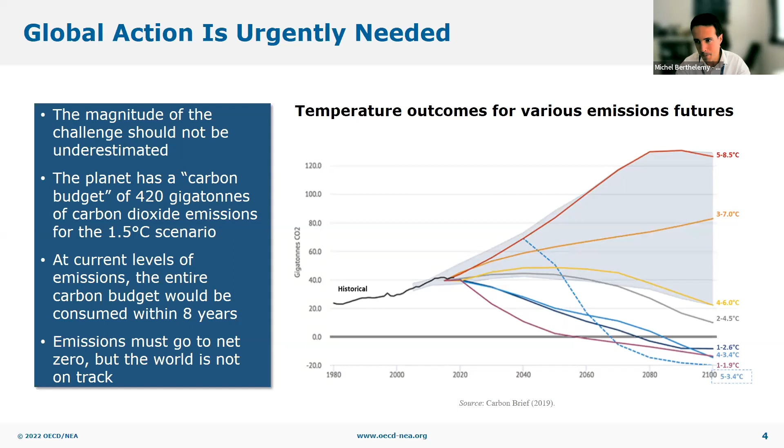So how do we get there? Go to the next slide. There's a number of pathways that have been published by a number of institutions, including partners of the NEA, such as the IEA. And all these pathways are based on this carbon budget we have to deal with, and they provide different strategies for how we can be on track with this objective, which then translate in many cases into reaching net zero by 2050.

First, it's important to note that all these pathways include some level of nuclear energy. On average, we see in many scenarios that would mean at least a doubling of nuclear installed capacity between today and 2050.

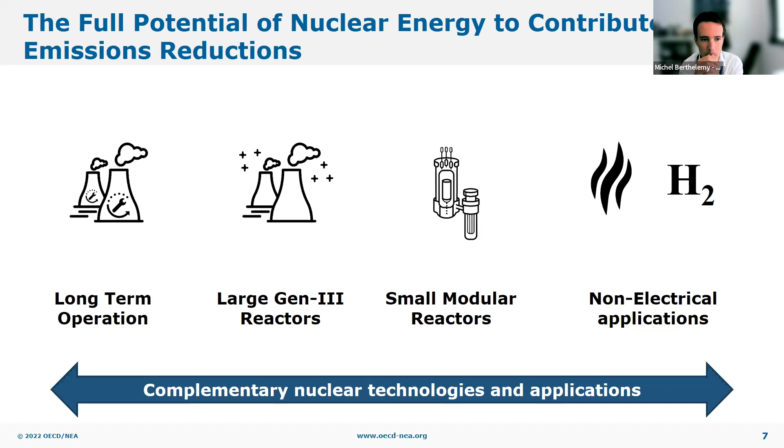Because time is limited, I'm going to jump straight to the result and our key findings. You will have more detail in the report. Our key finding was that looking at conservative and aspirational projections for nuclear energy in these different blocks - long-term operation, large-scale new build, SMR, both electric and non-electric application - we see that nuclear installed capacity could reach by 2050 nearly 1,200 gigawatt electric compared to about 400 today. So it's nearly a tripling of installed nuclear capacity.

What's interesting, you can see on this graph, is that when we look at what the IPCC says in its summary report, on average scenarios, world climate change mitigation scenarios will require a tripling of installed nuclear capacity. It's very much a coincidence that we show one of these key conclusions of the average of scenarios the IPCC is looking at might well be within reach if we can really rely on all nuclear technologies and applications.

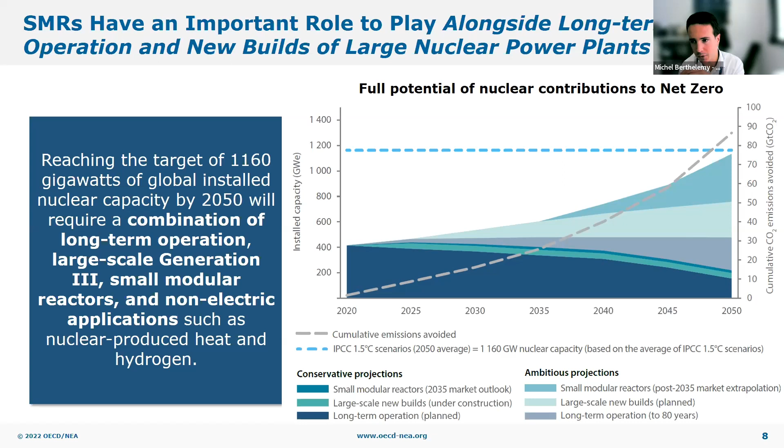However, there's a number of opportunities or challenges for us to get there. When we really limit our exercise to what is currently either in operation, under construction, or planned, we see that starting in the 2030s there is currently a growing nuclear capacity gap, which translates into very much some urgency for taking action today.

And of course, the challenge here is that one needs to translate to policymakers that they need to take action now, and if they don't take action now, they won't really realize before the coming decade that they're not on the trajectory that will be compatible with meeting climate scenarios for nuclear.

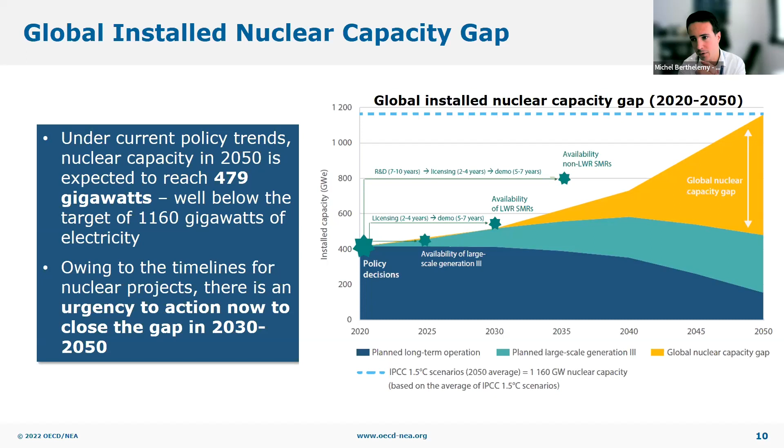We identified in the report a number of key challenges, and I won't list all of them in the interest of time. I will focus on one that, from the work NEA has done over the last few years, we really see as the most significant: understanding what is the cost and competitiveness of nuclear power in net zero scenarios where we're going to have large scale renewables in any case.

This is important and central because a lot of the conversation today still relies on plant-level analysis of the cost of different technologies, nuclear and renewables. Only looking at plant-level cost, we see that becoming an increasing challenge in a world with variable renewables, because there's a number of costs occurring at the system level related to integrating variable renewables, managing the grid, and getting more margins for your systems with more intermittency of renewables. All these costs, as we have higher shares of renewables, become increasingly significant.

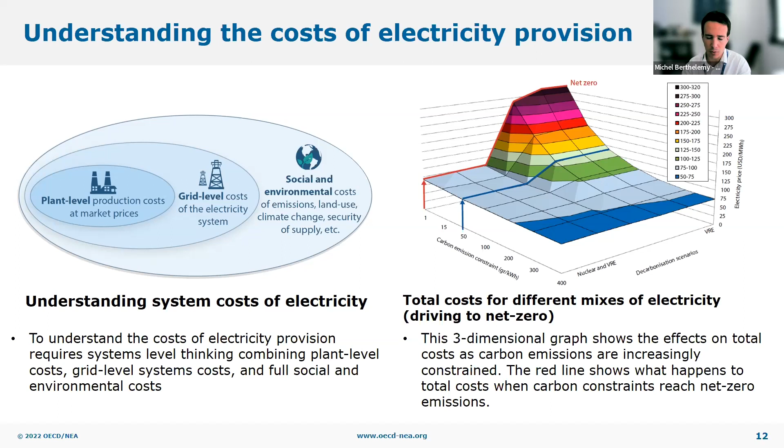So really, we see that as critical for understanding what will be the competitiveness of nuclear in the future.

Moving on to conclude briefly with some recommendations from this study. The first is on the urgency of action. This is something for both government and industry that have to come together to address this challenge and demonstrate that we can commercially deploy nuclear energy innovations at scale.

First is on addressing timelines, because there is clearly some issue with providing the right timeline for taking action on climate. Sometimes one may hear the argument that nuclear power plants have too long construction time, and that the lead time might not be compatible with the urgency of taking action on climate.

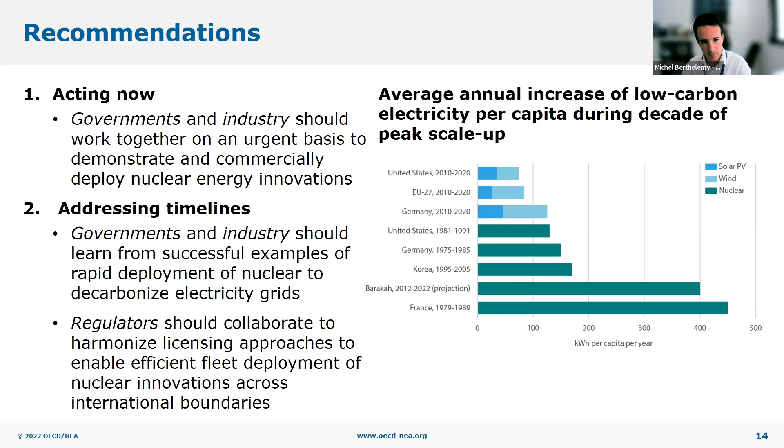In a way that will be compatible with climate timelines. Moving on to the next slide, and this will be my last slide, a few additional recommendations.

First, on the importance of understanding and reducing cost. This is something on which the NEA has done extensive work at the system level, but also at the plant level, in particular for OECD countries, providing practical advice for governments and industry on how we can reduce the construction costs of large-scale Gen 3 reactors. Our study shows there is a significant opportunity in the coming decades to do so in OECD countries.

Of course, this is not something industry or government can do on their own, and there is very much a sense that this has to be a joint effort. Public confidence, maintaining a high level of public confidence and trust, is also equally important in our eyes.

I will finish with one last point, on financing, where we see that, if the other points are addressed, it is still a significant challenge that has to be tackled, including the role of nuclear in taxonomy and ESG, among other themes, all of which we will have the opportunity to come back to, I'm sure, in other IFNEC webinars. So with that, it concludes my remarks.

And again, thank you for the opportunity. I look forward to the questions and discussion afterward.

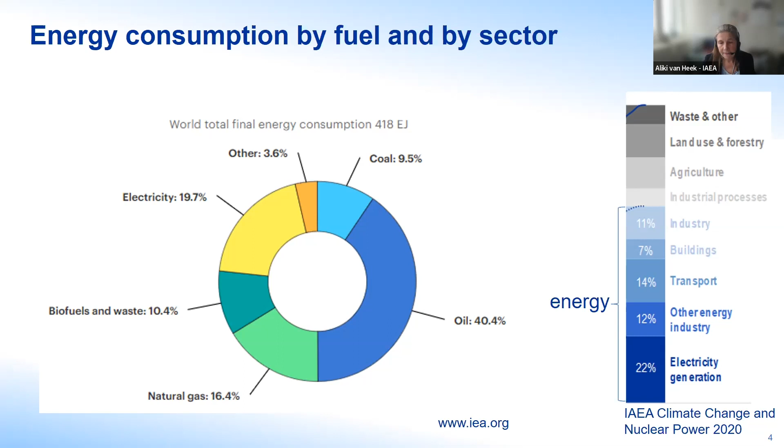As the previous speaker mentioned, climate change mitigation is urgent. So when we're looking at how to replace coal with nuclear, it's wise to look first at those countries that already have nuclear programs existing or are already engaged in starting up new nuclear programs.

So among the 32 countries currently operating nuclear power plants, there are 10 countries that have decided to include nuclear energy in their generation mix, with plants under construction or in advanced stages of preparation.

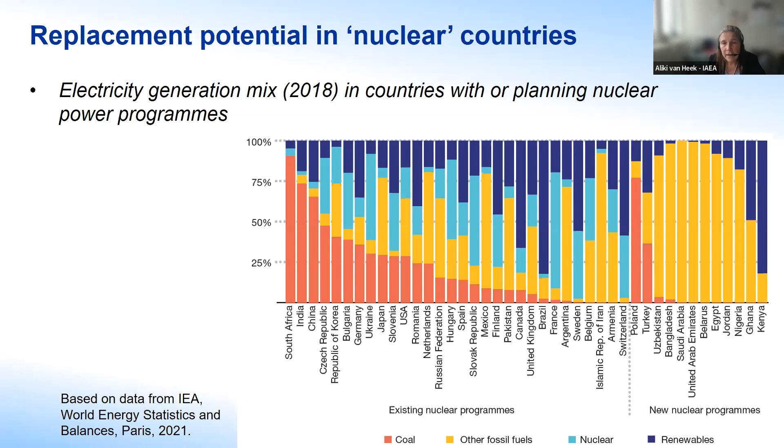This is the Temelín nuclear power plant in the Czech Republic, which has a heat distribution system extended to the town nearby. This helped to eliminate 22 medium-sized coal-fired boilers in heating plants, and 3 large boiler facilities, with this nuclear facility—which also helped clean the air in this region a lot.

Which nuclear technologies could be available to replace these fossil fuels? That's on the next slide.

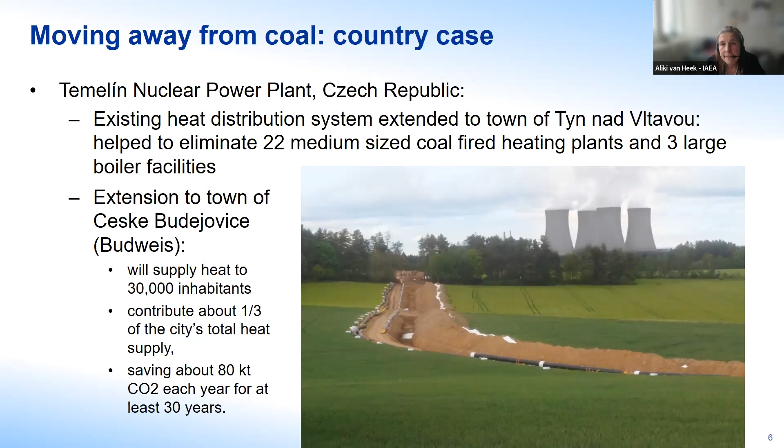We have categorized the nuclear technologies for replacing coal into 4 groups. The existing water-cooled technologies are the first category, but there are 3 other ones with small modular reactors. The large water-cooled reactors can provide electricity and low temperature heat, and could replace coal as a multi-unit power plant. It's a mature technology, with more than 300 units in operation.

Then there are 3 categories of small modular reactors: the water-cooled ones, and small modular reactors which are advanced technology, usually with different cooling media like helium gas or sodium. Then there are the advanced small modular reactors that will need more time for development, with salt or lead cooling, and also the very small ones, the micro reactors.

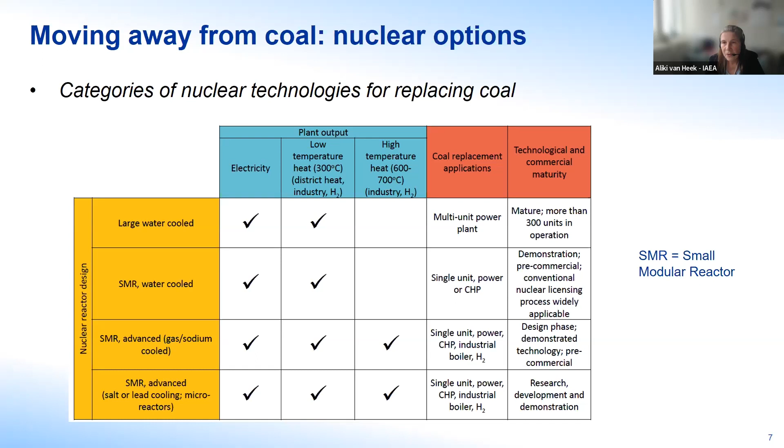Okay, how about then replacing other fossil fuels like oil and gas? Today, many hopes are put in the hydrogen option. Next slide, please.

There's these options of power storage, steel, shipping, aviation. They're highly likely in large long-term demand, so there's a lot of attention going there now. And the others, the yellow ones, are potential role technology options.

So that is more further away: high temperature heating, rail, plastics, and heating. And then there's some short-term transitional uses, but that still could be quite useful to get the market going, to get this production on a relatively relevant scale going, like co-firing of ammonia or hydrogen, or gas grid blending.

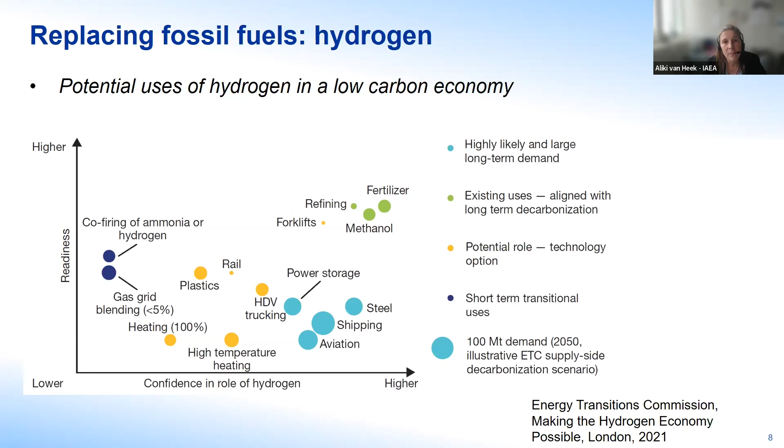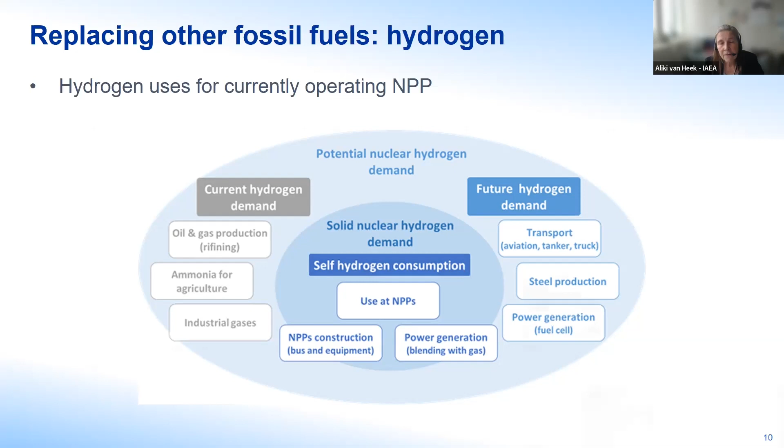Next one, that's the final slide, so looking at some differences and some outputs of this hydrogen project. We observe several project differences in search for the markets. Each utility targets different demands, but faces all the time the same challenge of finding a market where they can secure a reliable revenue stream for their hydrogen development projects.

There's no winning electrolyzer technology yet. Different technologies are being selected, and there's no clearly defined superior technology yet.

And then the location - there's still discussion whether to put that near the nuclear power plant or near the user facility, the hydrogen demand facility. When hydrogen is used primarily at the nuclear power plant, of course it's put near the nuclear power plant, but it's only as a step to commercial hydrogen production. And of course when there's a large demand facility, the electrolyzer will be put near that location and the electricity will be transported there.

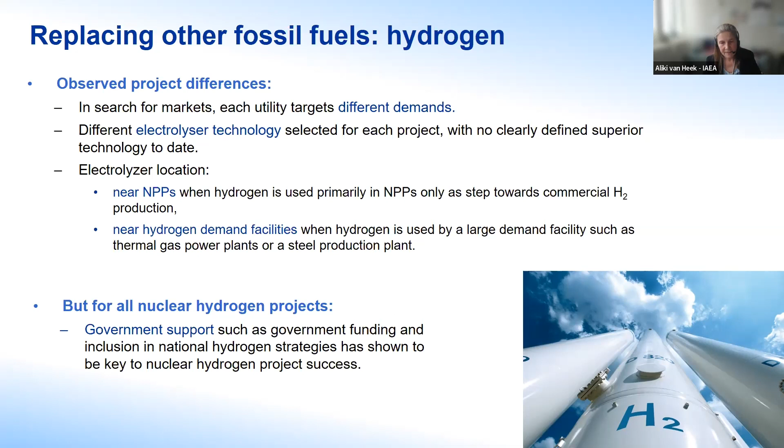But like the previous speaker already mentioned, government support is essential, such as government funding and inclusion in national hydrogen strategies. It is key to the nuclear hydrogen project success. And with this, I want to conclude my presentation, and I'm open to questions.

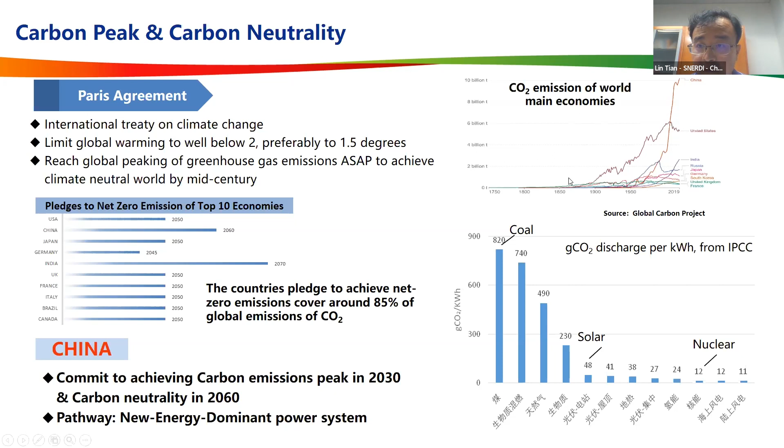Traditionally, we know coal provided energy for different scenarios, including electricity, traffic, heating, process steam, and others. But in the context of carbon neutrality, coal is not a preferred option, so we focus on the development of renewable energy. For the past years, the installed capacity of renewable energy has increased a lot in China. But on the other side, its inherent disadvantages, such as being random, intermittent, and seasonal, bring great challenges to grid stability. In order to support the renewable energy system, we have to spend lots of money on energy storage. So on one side, renewable energy could provide part of the electricity supply, but on the other side, it could not provide heating directly. For nuclear, in this new scenario, if we want to decarbonize the electricity system, nuclear energy will be preferred because it is low carbon and also stable, and more importantly, reliable.

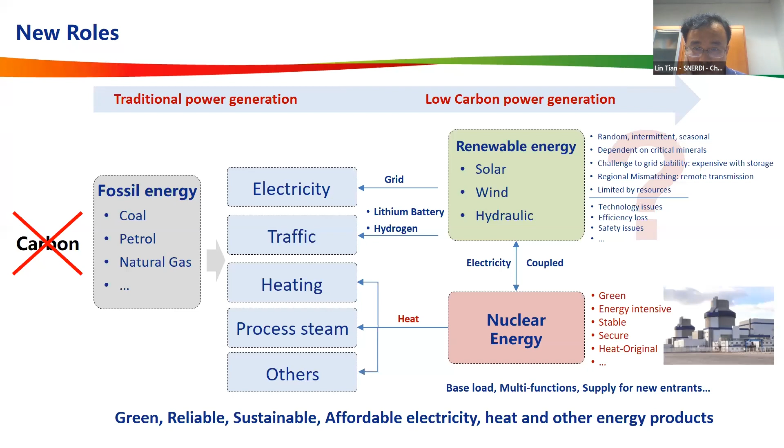Just now, Ms. Hick has said that different technologies of nuclear power could play different roles. So for us, we think in the new system, nuclear power could not only provide electricity, but also heating, steam, desalination, and hydrogen. More importantly, for heavy industry and also for some load centers, electricity demand could be satisfied by the macro power grid, with large units constructed near the load center. And for areas with intensive energy use, districts in urban or rural areas, and data centers, we could provide the SMR to satisfy the electricity demand.

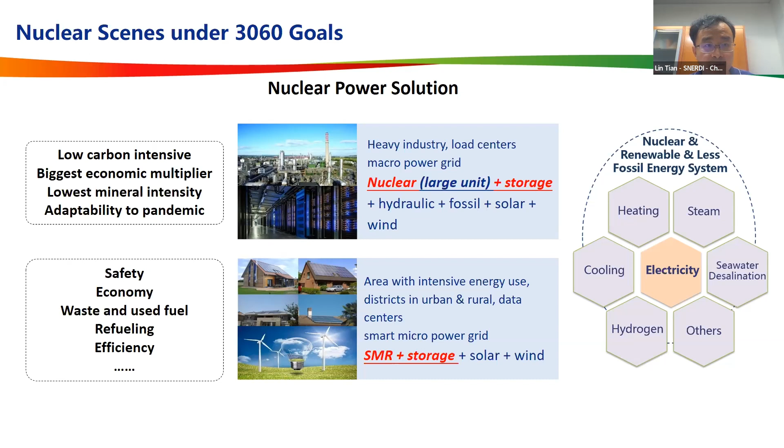What kind of policies or pathways we choose depends on demand, resources, and capabilities. This is a proposed deployment suggestion from our point of view. For the northeast part of China, which is very cold in winter, we think the SMR could be used to replace existing thermal plants. And for the coastal provinces, including Shandong, Zhejiang, Guangdong, Guangxi, large-scale nuclear power plants should be constructed to satisfy electricity demand. As we know, the first nuclear heating project has been realized in Shandong Haiyang. For the past 2 years, it has realized zero carbon emission for winter heating supply.

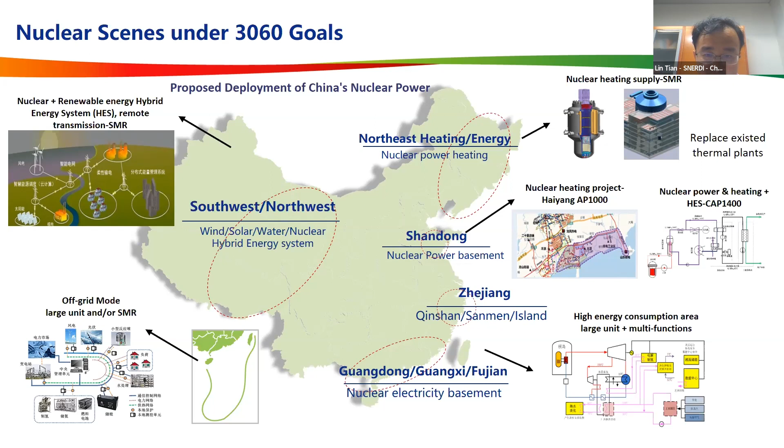And for the southwest and northwest of China, the government has put forward the large-scale renewable base, but simultaneously we have to construct fossil plants in order to transmit the renewable energy to other areas. So we think for this scenario, SMR could be constructed in these areas. The relationship between renewable and nuclear power is not competitive, more importantly, they cooperate with each other. And for another scenario, such as an island grid mode, the nuclear SMR could be constructed and work as the energy center to provide electricity, desalination, and cooling.

We have seen the future of nuclear power in the context of carbon neutrality, but there are lots of challenges in front of us. These are concerns from the stakeholders, and what kind of mechanisms should be established to make it happen. For policies, the regulation of SMR—just at the very beginning, Mr. Michel put forward a similar opinion. We know for the traditional large-scale unit, the regulation and review process is very time-consuming. So this is a challenge in front of us.

More importantly, we should put nuclear power and other renewable energies on the same playground. That is to say, nuclear electricity is green, but the carbon trade mode does not include nuclear power up to now.

Also, what kind of financing mechanism should be established to support the long-term R&D process and also the long-term construction period? We need to innovate in the commercial cooperation mode. More importantly, on society price, just in the very beginning Michelle also said we should not only take the plant price into consideration, but also the grid price and the society price. So what kind of mechanism could be established? For different countries, they have different challenges. So it's not an easy task.

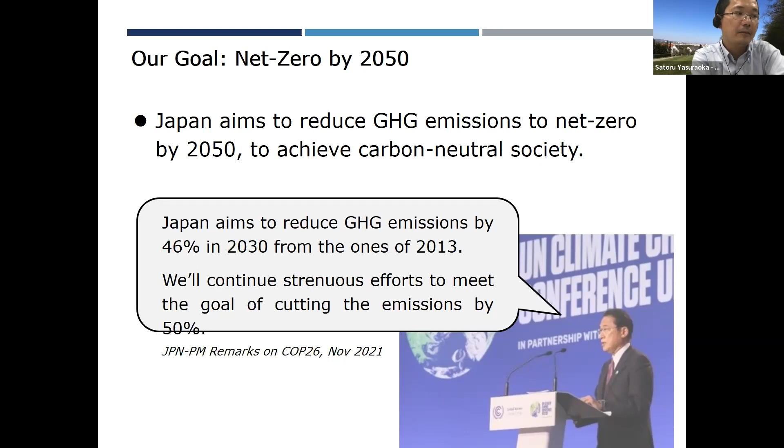But the Japanese government declared last year its aim to reduce greenhouse gas emissions to net zero by 2050. To achieve carbon neutrality, the Japanese government should give strong incentive for companies to tackle issues on innovation and investment. For that purpose, the government of Japan established a very large-scale fund called the Green Innovation Fund. In this policy measure, nuclear power is one of the targeted sectors with high priority.

This slide shows the historical overview of electricity production by source. One point you can easily see is that for the latest decade after the Fukushima Daiichi accident, the share of nuclear power has significantly decreased and was mainly substituted by fossil fuels like coal and gas.

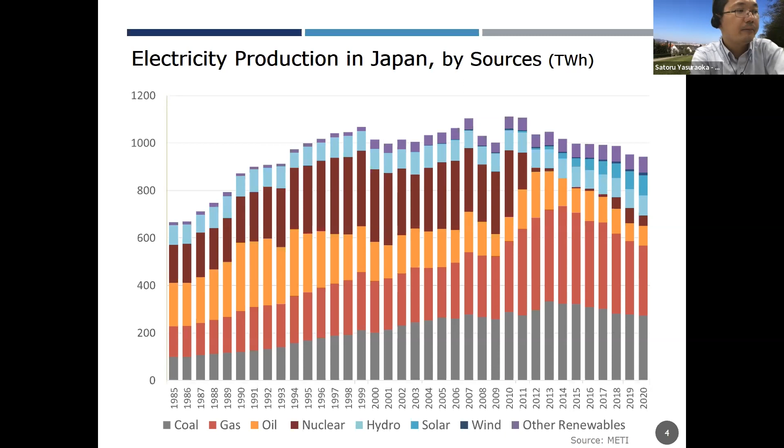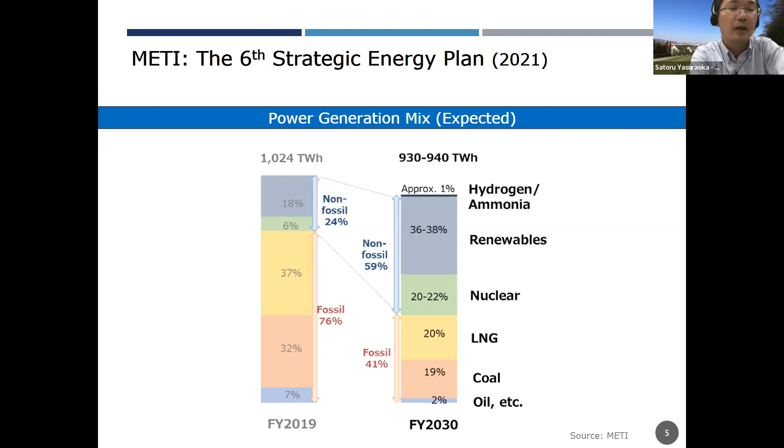And this is the latest prospect of energy mix in Japan, published by my Ministry of Economy, Trade and Industry, the Japanese government, last year. Japan aims to reduce the share of fossil fuels according to this energy mix, practically as much as possible, and expects it to be substituted by renewable energy and, of course, nuclear.

This slide is an interesting quote from IEA's analytics on projected costs of generating electricity by region, including Japan. The IEA study suggests the cost of solar or wind power is much higher than in other regions like the US, China, and European countries, mainly due to geographical difficulty in Japan. So it seems nuclear power is cost competitive in Japan, at least in theory.

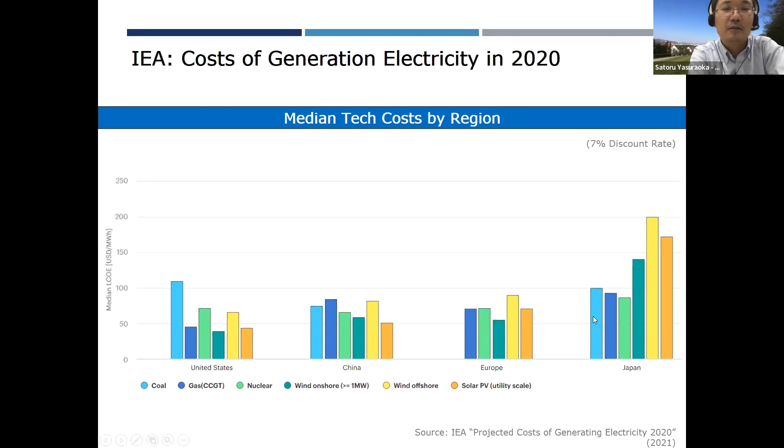As you may know, there are a lot of challenges and practical difficulty in getting public acceptance so far.

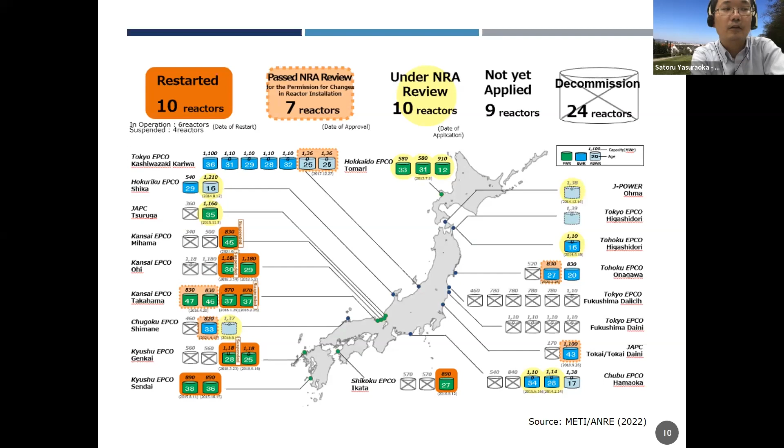This is the detail of the status, a map of the nuclear power plants in Japan.

Based on this situation, Japan faces a crisis balancing electricity supply and demand—a very, very difficult situation. Last month, Japanese Prime Minister Kishida made remarks on nuclear policy for securing energy security.

The Prime Minister declared the government of Japan will make every effort to restart the nuclear power stations and ensure the 10 reactors are back online.

The Prime Minister also mentioned that political decisions are needed to step forward, with issues including the long-term operation of existing plants, as well as consideration of development and construction of next generation advanced reactors in Japan.

Right now the government of Japan, including METI, has a significant task in nuclear policy: speeding up policy discussions among experts to reach a conclusion on nuclear policy by the end of this year, 2022. So we are in a very exciting, hot phase.

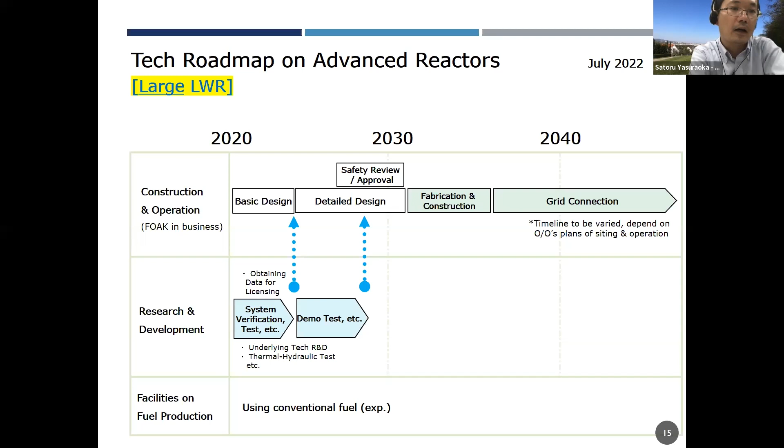One month before the remarks, a technical working group under METI published a technology roadmap on the development of advanced reactors. This slide shows a quote from the roadmap for large types of light water reactors. As a disclaimer, this is very tentative—we have to dig up more details and feasibility study, and the timeline can change depending on the owner and operator's plan in the future. But this is our tentative prospect for light water reactors.

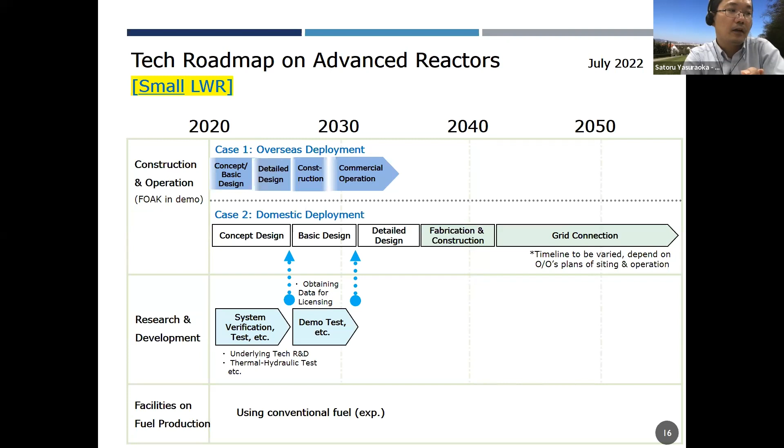This roadmap also introduces other types of reactors, like high temperature gas cooled reactors or fast reactors, but I'll abbreviate them to save presentation time. If you're interested, you're welcome to find the materials on METI's website—they're publicly available.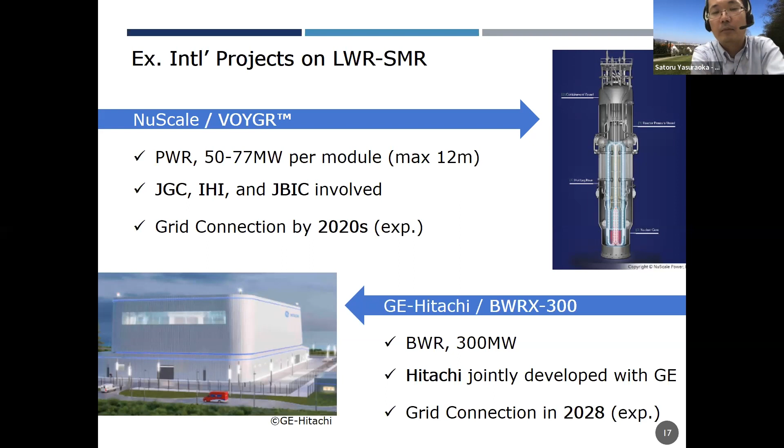Another example is BWRX-300, jointly developed by GE Hitachi. The first plant is expected to connect to the grid in 2028 in Canada, followed by distribution to other regions, including embarking or operating countries.

This slide introduces elemental technology for safety improvement prepared for severe accidents after lessons learned from the Fukushima Daiichi nuclear power accident. Some of these, like high temperature resistant corium shields, are already installed at the Kashiwazaki-Kariwa nuclear power plant, units 5 and 6.

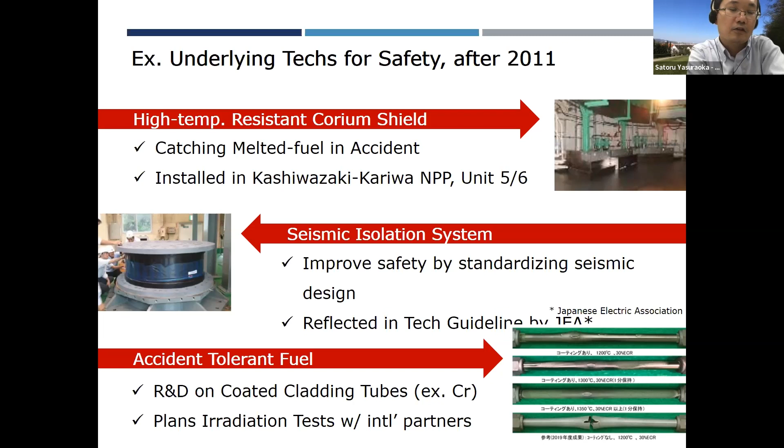Others are expected to be installed in future plants, such as accident tolerant fuel, which is now being developed through international R&D collaboration with partners like US laboratories. Last but not least, the Japanese government also supports non-light water reactors.

HTGR, the helium gas cooled reactor, has been developed by JAEA, and recently announced to start a feasibility study with UK entities, NNL, supported by the UK government. This plant is expected to produce not only electricity but hydrogen, utilizing high temperature heat around 950 degrees Celsius. This is very interesting technology to collaborate with international partners.

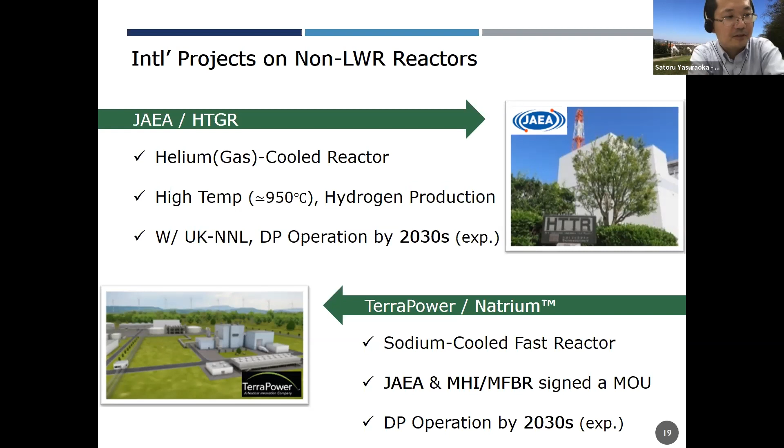The other one is a natrium reactor developed by US-based TerraPower, a sodium-cooled fast reactor. Japanese technology entities like JAEA and Mitsubishi partners are involved in this cutting-edge project. So the Japanese government, especially METI, is very happy and willing to push these advanced reactors forward.

Now I reach a conclusion. It's a very interesting phase. Prime Minister Kishida remarked nuclear power plants need to step forward more. We have to consider utilization of existing plants and development of advanced reactors. Japanese private firms and national entities, R&D TSOs, have developed varied types of reactors so far, including large light water reactors, SMRs, HTGR, and fast reactors. We have a lot of options. We will speed up discussion among experts to reach conclusions by the end of this year.

Thank you so much for listening. If you are interested to hear more, I'm always welcome to your questions.